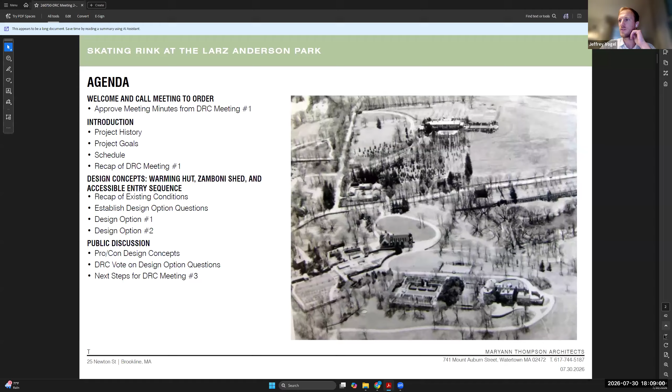Okay, great. Evening, everyone. I'm going to share my screen and pull up our presentation. So, project history — just a quick refresher on the previous meeting, a quick recap of where we left off last time.

We have our project goals that we went through last time: fossil fuel free mechanical systems, managing change, and looking at the historic gardens, which was the focus of our last meeting. Rink improvements and site improvements are things we're going to be looking at in future meetings, as well as seasonal year-round programming.

Today, we're going to focus mostly on warming hut and support building improvements, as well as site accessibility — the paths up to and around those buildings. That's going to be our focus of the meeting today.

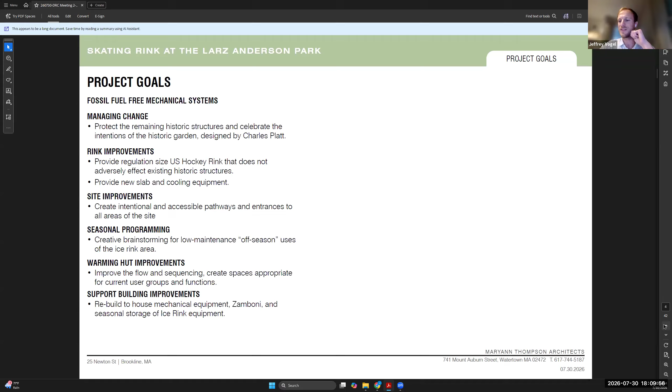Last meeting was a great chance to go over all of this and get everyone's thoughts and feelings about what's important here, and lay the groundwork for us to build off of for this meeting and the future ones. So, a quick update to our design schedule here.

We've gone ahead and, after the last meeting, added a couple more. We initially just had 3 meetings. Now we're proposing 5 design meetings for part of this process. So, as I mentioned before, today we're going to look at the conceptual layout of the support buildings, the warming hut and the Zamboni shed, as well as the accessibility paths around them and up to the site.

The next meeting is going to look more in depth specifically at the ice rink and the landscape around it. The 4th meeting is going to combine meetings 2 and 3, so we'll have one concept plan that combines architecture and landscape. And the 5th meeting is going to be the final — ideally, approval of that plan along with the project estimate.

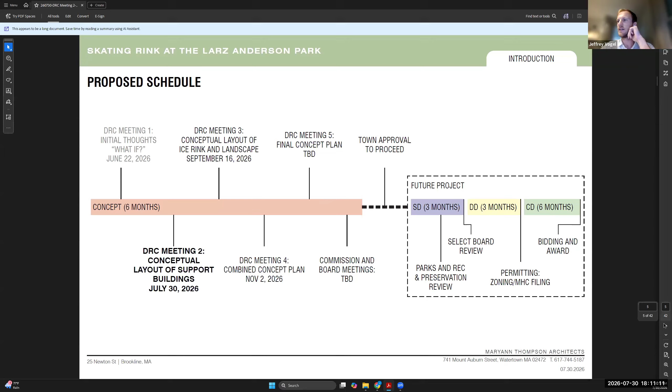The 3rd meeting, our next one, is scheduled for September 16th. The 4th meeting is November 2nd, and the 5th meeting we don't have a date selected for yet, but we should have one soon. That's the duration of this conceptual design process. Following this, we would need town approval to proceed with the full design of this project. So that's the focus here.

When we met last time, we looked at 2 separate ideas about entering the building and the site — one from the side of the existing warming hut building and one from the center. So we're going to look for direction, and hopefully approval on one versus the other, as well as the idea of outdoor gathering spaces in and around these 2 support buildings. That's the goal of our meeting today.

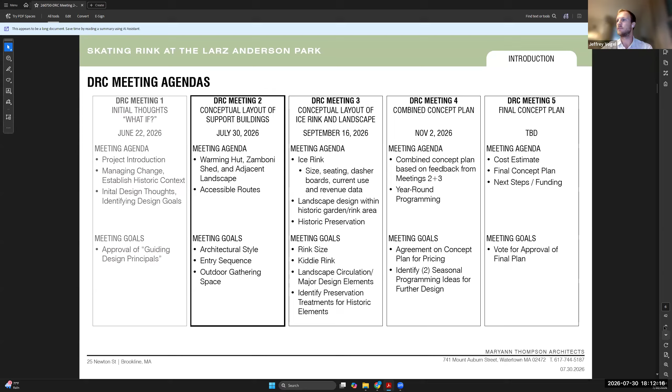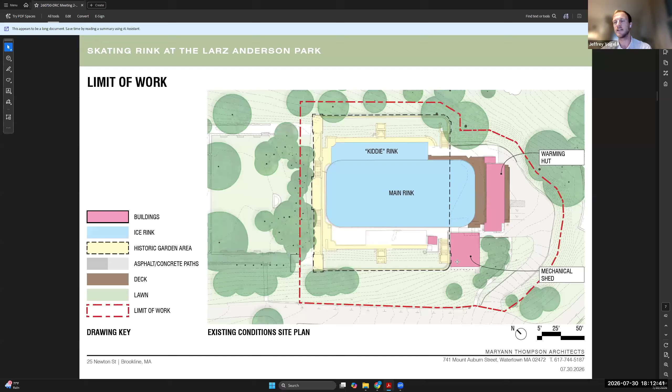Today specifically, we're looking at the warming hut and the mechanical shed, the two buildings in pink, and the landscape surrounding them, including the path up from the larger parking area, down at the bottom of the hill. That's the focus of our call today.

A recap of the last meeting, what we heard from everybody, key points. We got unanimous approval of our proposed guiding design principles for working within the historic landscape, which was great. We were really happy to have this baseline of design ideas that we're working from going forward.

A functional ice rink is going to be crucial for everybody, all user groups of skaters and hockey alike. That's going to be the focus of next meeting. We're not looking at the rink specifically this meeting, but we are actively working on it with our ice consultant to get more details so we can have a robust conversation next meeting.

One other thing we heard about the current rink is that people enjoy, and it's important, and it's in the town mandate, that we keep the rink open air. So the idea of things overhead at the rink is something that we should avoid.

We heard that it's important that accessible parking spaces remain at the top of the hill. We want to keep the site as easily accessible to everybody as we can. That was an important piece of feedback we got last time that we've incorporated into this round of design.

Improved access to all sides of the rink would be very beneficial. That seemed like something everybody was supportive of during the last call, as well as improved connections between the facilities here, the rink, and the surrounding landscape in the park.

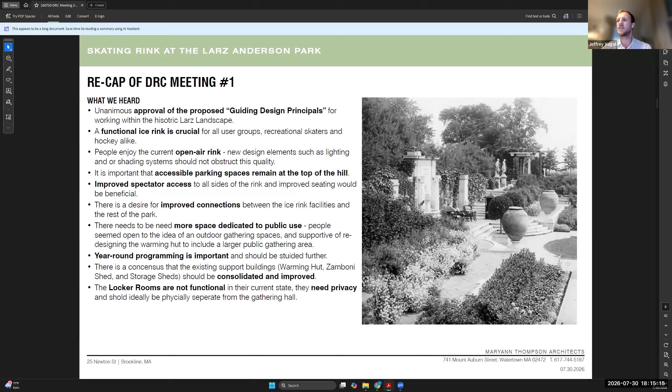So that was some of the key takeaways from the last call that we looked at going into our design here. And again, just a quick recap of the guiding design principles that we looked at.

Honoring the preservation restriction, we have preserve, restore, and reconstruct the historic frame of the garden, shown in pink. We're not going to be looking at that so much today, as we are going to be looking at the area in blue, defining a rehabilitation zone for new construction that improves the skating experience and respects the historic context of the site.

So that's what we're looking at today in relation to the buildings and the landscape around them. And the final point, prescribing solutions that meet universal accessibility requirements throughout the site and minimize the impact on the historic designed landscape. So that's a quick recap of what we talked about last time.

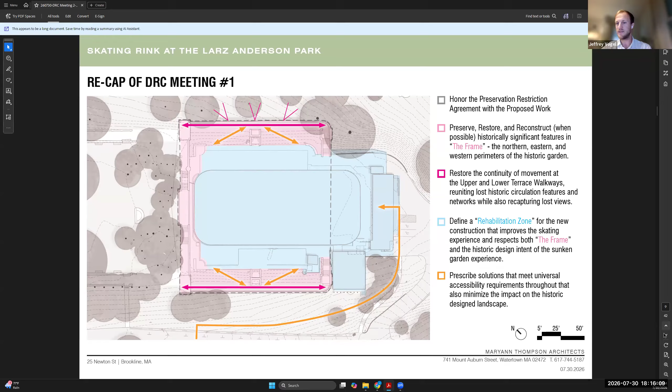Before we jump into the design, I want to just quickly take us through existing conditions. I know all our DRC members have been out to the site at some point previously, but it's been a little while now, so just a quick refresh on what we're looking at as kind of critical pieces of this redesign.

Starting on the site level, thinking about access, there's no true accessible path from the main parking lot up to the site, which is a big problem. We have this driveway too steep to be accessible, and then we have a staircase running up, so there's no accessible path up to the building. If you're not parked up in one of the accessible spots at the building, there's no other way to get there if you need that accessible path.

The current parking lot at the top, although it looks flat, our design team, our landscape team has been looking at it, and it really does have some issues in terms of ADA even up there as is. The layout of the parking spots and that area itself, although better than the driveway up, is still not quite up to current standards when it comes to accessibility.

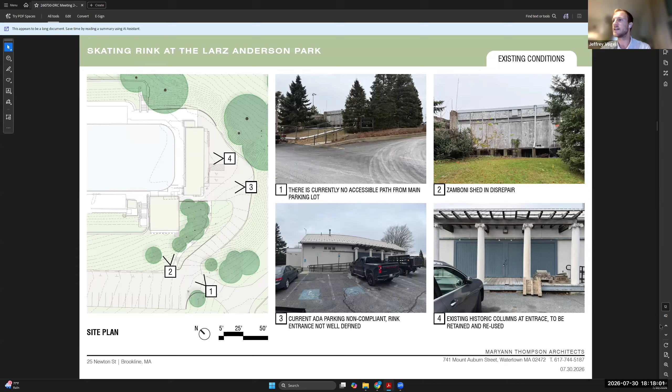Continuing looking at the site, the existing Rink entrance is not super well defined. It's kind of to the side of the building, around the parking spaces, a little bit blocked off, and not super welcoming. You come in looking at this block wall before you turn in. The accessibility right now needs to be improved getting up to the building. You have this winding ramp network that becomes a little serpentine and can become a pinch point getting in and out of the building.

Again, just looking at the Zamboni shed, its proximity to the historic wall, something we'd like to minimize the impact of, and at the same time find a way to allow people to access all sides of the rink around the Zamboni shed, ideally if we can.

And then just a reminder of the warming hut, how it looks now from the ice with that row of columns underneath that eave of the building, which we're looking at keeping in all the schemes we're going to show you today, as a reference to the old loggia, the old pergola that used to exist at the south end of this garden.

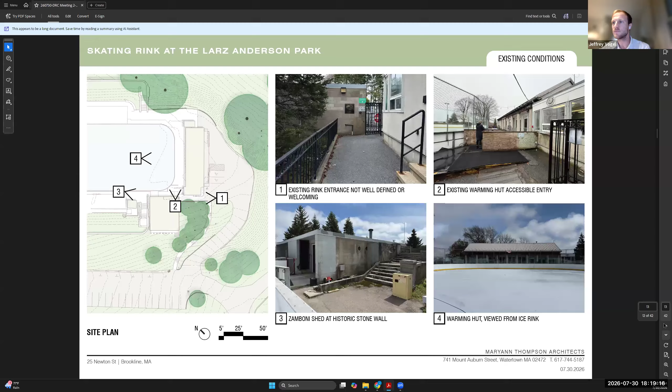A few more site photos. One pointing out the current vehicle access route is partially blocked by a storage shed here. So we're looking to consolidate that and make a more clear vehicle access route around the backside, keeping it in the same location. Again, temporary sheds that are really just cluttering the site and are in the historic landscape that we want to remove and incorporate into our new design.

One piece of feedback we heard was that the seating, where people are sitting now, is along the edge of the warming hut in these benches. But these and the hockey stick bins are things that have utility for people that use this rink. So these are things we want to think about reincorporating in an intentional way when we're coming into a new design.

And the last photo here is the current part of the gathering space, which is just a little bit too small for the size of the rink. So no matter the program, what's going on out there, it's not quite a big enough or comfortable enough area for people to sit down right now. That's at the bottom right here next to that storage shed we're looking at on the top right.

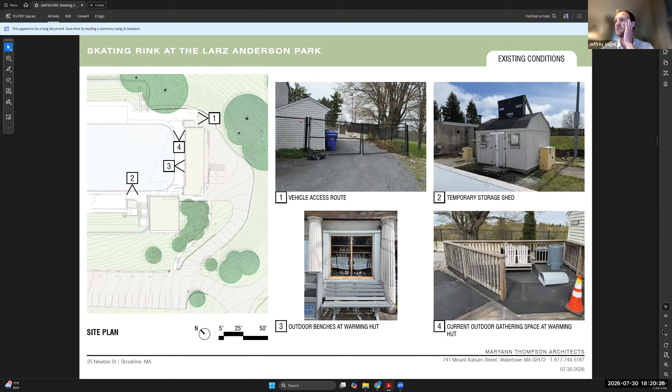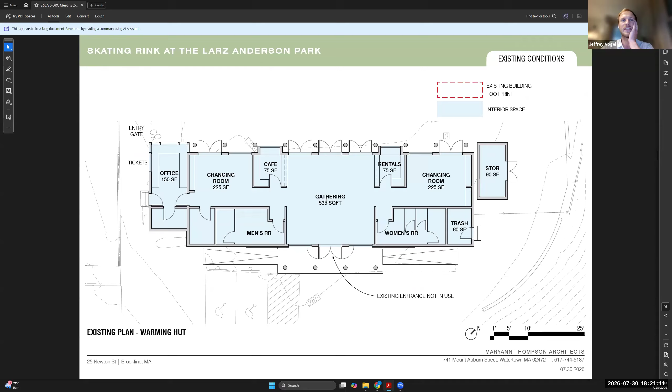And then again, as a reference here, we have the existing plan with existing room sizes so that we can have a more tangible understanding of what we're proposing in terms of increasing space or moving space, how we're proposing changes take place here, what we think makes sense. And then the same thing for the Zamboni shed.

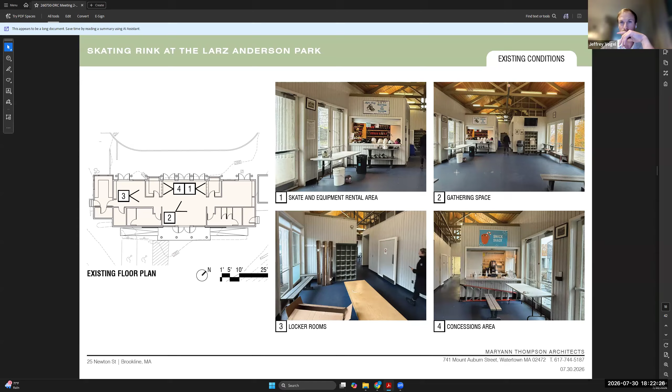So these are parts of the interior that we've looked at addressing. And then from here, we're going to jump into our design concepts, starting with accessibility.

So I will pass it over to Glenn Valentine from Stimson, who can take you guys through the beginning of our first design idea. Go ahead, Glenn.

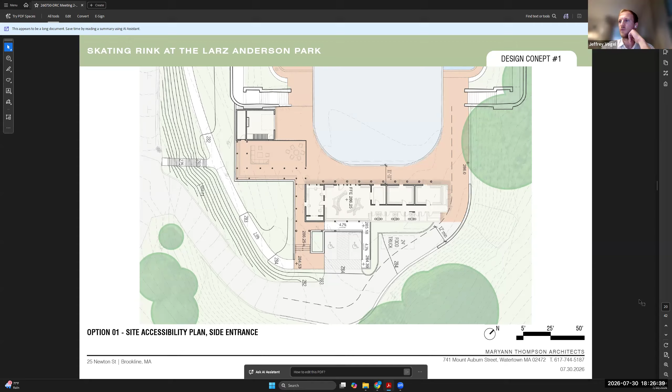Okay, that's it for this slide, from Jeff. Here, we can jump to Maryann, who's going to take us through the first design concept from the architecture side.

Hi, everyone. We're excited to get your feedback. So I think the scheme has gotten a lot better based on feedback we got from you last time.

Glen brought up that the loggia creates a kind of defining identity from the parking down below, and that was somebody on this Zoom call last time who brought that up. We just really thought it was a great idea to have something that signifies there's something wonderful up there, very different from what you have now with that pretty ugly Zamboni hut right there.

So with the entry, we're using the old columns, the four old columns at the front, and then we would move to a wood column, kind of a traditional wood column that would create the loggia, and it creates a space that's in between the warming hut and the Zamboni shed that we're thinking could be a really wonderful south-facing space that overlooks the skating area.

We're thinking it could have a fire pit that people could gather around and stay warm. In that sense, it would expand the indoor gathering space. It could have places to sit.

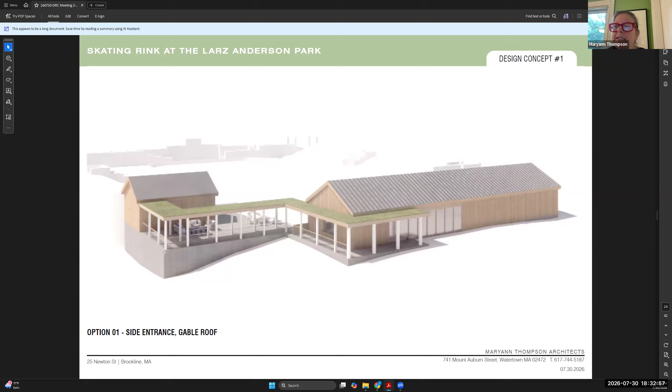We're keeping the idea of the gable roof in this scheme, similar pitch to what you have now, and it would be a metal roof like what you have now. Then you can see the hill slopes down, so where the loggia is and below the Zamboni hut, the hill slopes down, and so you're getting a full basement. It's really almost like a walkout basement that's right in on the footprint of the existing utility room, and it would be for storage and utilities. Probably have a door to the outside.

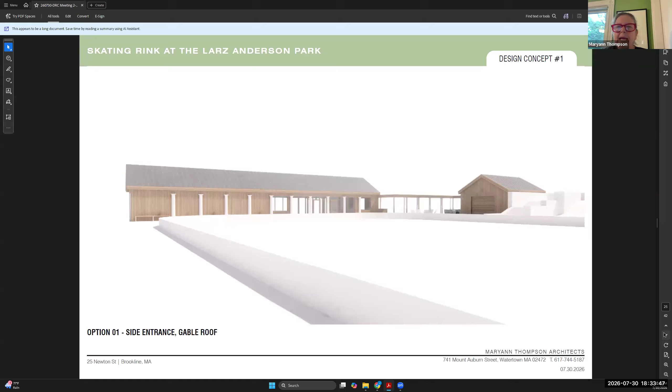I think if we back up to the plan, Jeff, I just want to say something about why. So the Zamboni shed, we looked at putting the Zamboni shed on the northeast corner, and we did a cost benefit of that, which had been brought up by the community on our last call.

The Zamboni, because it crosses the sidewalk or the plaza to get onto the skating surface, it's possibly dangerous. So it's much better in this location, but there were two reasons that we kept it here.

It's much better in this location because the kiddie rink is up on the right side of the page, and people might be going from the kiddie rink to the fire pit to the gathering space when the Zamboni's out on the ice. So that's kind of a desire line, a pedestrian path in the northeast corner of the site. That felt like a bad idea to move the Zamboni, since we don't want it crossing people's paths.

The other reason was it would be very expensive to move all that. We have all the utility lines coming in, basically right below that outdoor seating, that outdoor couch. So we decided to keep the Zamboni here for safety and cost reasons. Plus it gets you a plaza that's south facing, which would be amazing in the winter in New England.

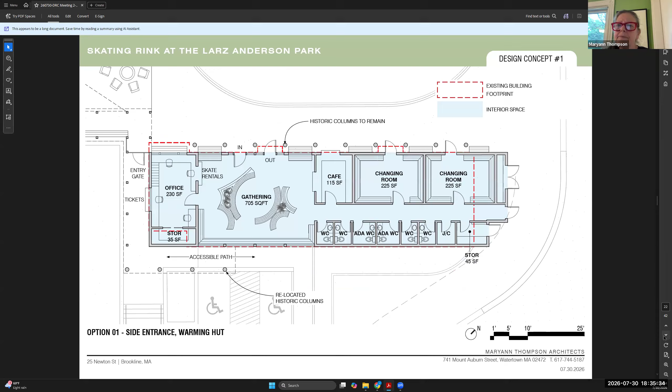Okay, and then the next one. So somebody on the call last time, one of the community members, said, why aren't you guys testing something that's a little bit more contemporary? So we tried a butterfly roof with the same principles.

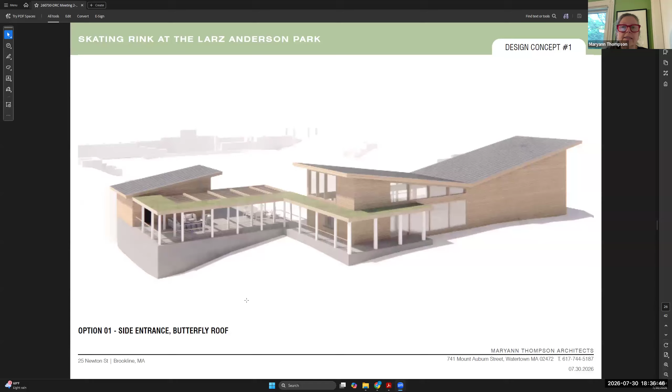We're happy with both. We're also trying a trellis over the outdoor seating area in this scheme, which is mix and match, it could go with either one, so nobody has to put up sails in the summer. It's just always kind of a place that could be shaded. We'd orient the slats of the trellis to let in the winter sun but keep out the summer sun, so it would be multi-purpose for winter and summer.

We have this view from behind as well, just to look at how does that feel when you're skating. Does it feel right? Does it feel like it fits this site? These are the things we want to hear from you, weighing the kind of stylistic consequences. What are these associations? And then next slide.

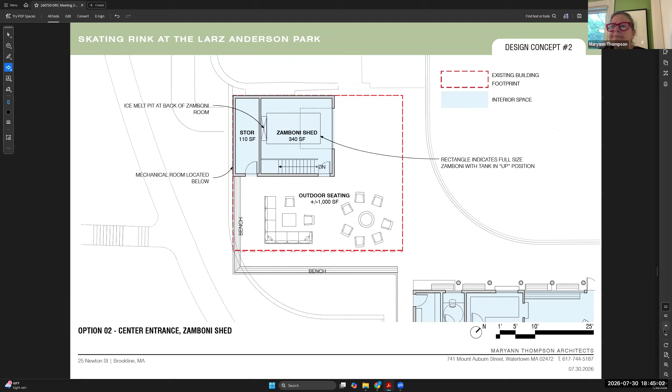Okay Glen, here's the character of this transformed landscape. Again you have that entry walk from the parking area, imagining a meadow flanking it on both sides, giving a sense of walking through this native meadow. You could have flowering trees, almost feeling like an orchard as you arrive. In this sketch, you get the sense of how this sloping walkway takes you directly to the central entry with no stairs, just a nice smooth transition to that space.

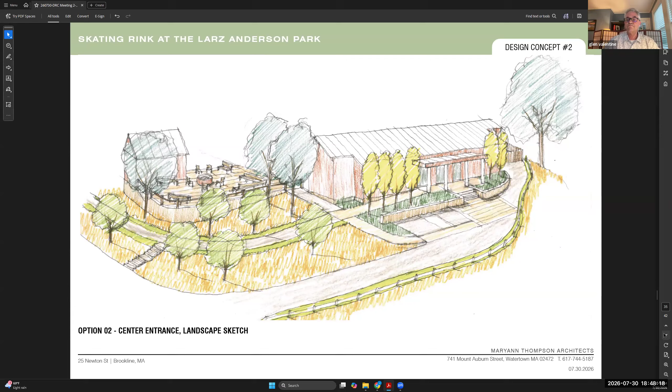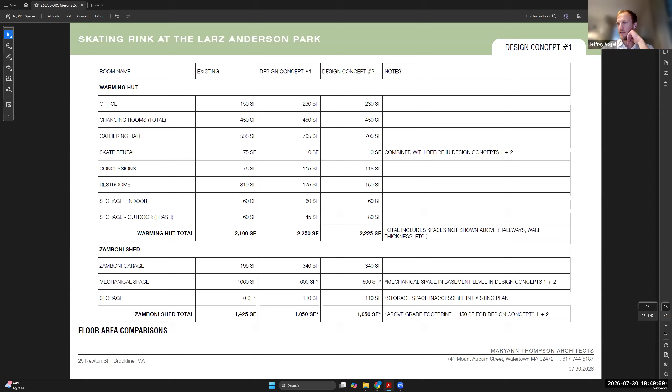So that's here as a reference point. And then from here, I think we're going to jump into our public discussion and the design questions that we'd love your input on.

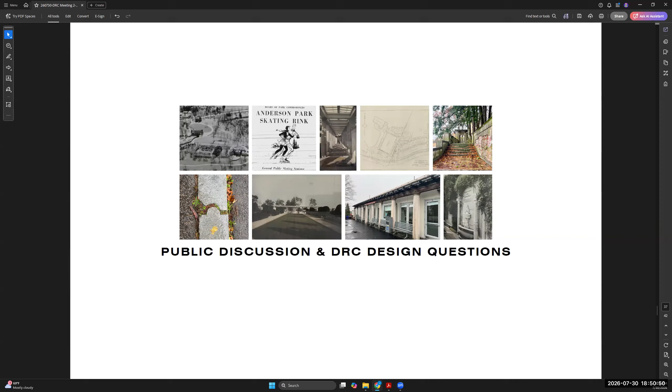I really like the two schemes that you put together. It's very interesting because I always think of a mix and match thing with regard to design. So I just wanted to make a few comments related to the building, if that was okay.

The first thing I was thinking of is I like the loggia connector. I think I sort of suggested maybe something like that, where you could make a connection between the two buildings and make it look more like a complex rather than two individual buildings.

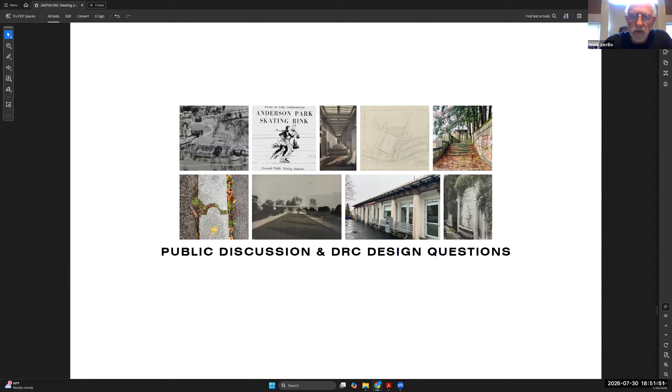I like it because I like the idea that maybe in the corner of that space, if you could put that plan up again, I could suggest we might look at a tower in that corner - the one in the furthest corner out on the lower side, where you could walk up and take a look at the garden at a higher elevation, any renovations happening to the garden, and a look at the entire open area of the rink. That might be something you could think about as a feature.

I know that at Putterham, at the golf course, there's a way to look at the greens in front of you by going up an open stair. I don't know if anyone has played at Putterham, but that's the kind of thing I'm envisioning - not really an enclosed thing, but maybe a stair up to a second level where you could actually look over the top of the buildings.

The other thing I was going to suggest is since we don't have the ability to use natural gas in the fire pit, I guess we'd be using propane. But even so, you might want to consider an open campfire type situation where you could build a wood fire, as if it was a campfire. That's just a suggestion, because it could also be used by people to roast marshmallows and do some other things, if allowed.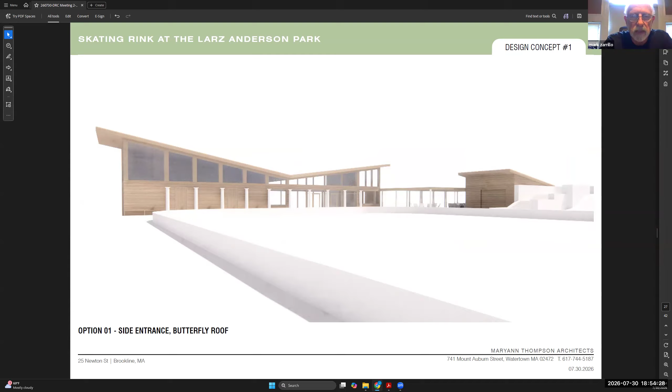I love the center entry coming in. If you combine that with the loggia, and in a tower that sort of pulls everything together, I would love to see something along those lines in terms of an architectural expression.

And lastly, I think - oh yeah, if we do work with the loggia wrapper that connects the Zamboni shed to the main building, you might think about not making it a flat roof, but making it slightly pitched.

It just adds a little more interest to that scheme, to that look, and I think it would coordinate with the pitches on the other roofs, if you could consider that. Those are my comments, but I really like the layout of the second scheme with the center entrance combined with some of the other design features that you came up with, which is really good work.

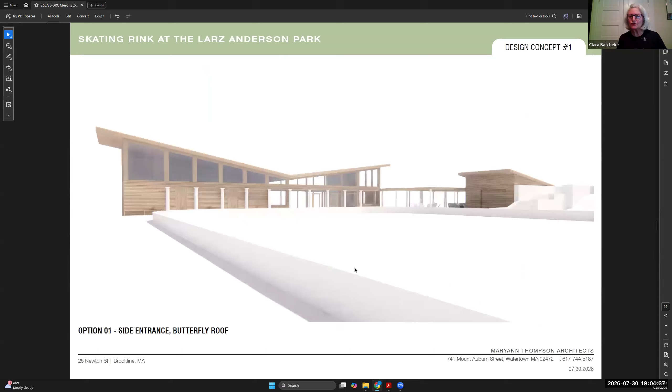So I'd like to see the structure kept fairly simple, as you've shown it in the other two schemes. I like the center entrance, and I think the loggia you were talking about in the first scheme you presented, with the entrance on the side—I think that's such a strong image. It almost detracts, you know.

I like keeping it—I like that there's a wonderful sitting area next to the Zamboni shed. And I think there's a way you could put an interesting fence around the sitting area. Whether we have a fire pit or not remains to be seen, but you could do something, a decorative fence, because you're going to have a wall there or something.

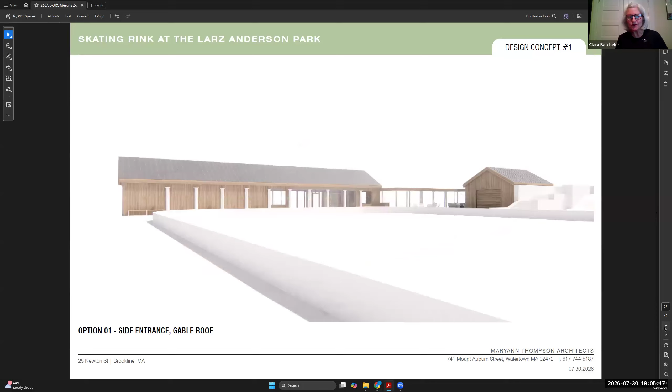But I would say I like the simpler scheme that has the entrance centered. And I agree it would be nice to be able to get your tickets on the outside as well as going in. But I think it's really nice how you focused this presentation on the buildings, and that's all I have to say. Thank you.

All right, thank you. Next, we have Jason. Hi, everyone, thanks for the work. I'll try to keep this brief. I have a number of comments, and I'll go through them, as my dad would say, staccato style.

First of all, I thought it was very clever the way you integrated the services and created the rooftop area on top of it, minimizing the massing in the building. I think that's great. I think I'm one of the lone people who slightly prefers the non-central entrance.

I think that the exterior ticketing makes a lot of sense. I kept imagining in the central scheme doors opening and people getting in the way of the gathering area in the middle. I think the side entrance has a little more, for me at least, a coherent plan.

I like how the office is consolidated as just one sort of generous gathering space. And then on the other end, it's just sort of the services in line.

I like the trellis, but what I would say—and I think you noted this, Maryann—it's used in the winter, it's also used at night. So make it something that's meaningful when you're cold and it's 10 degrees out and sunny, but also when it's like 4:30 at night and it's hockey practice and you're arriving and you want something welcoming as well. Maybe it's not sunlight, maybe there's some other thing integrating lighting or something like that.

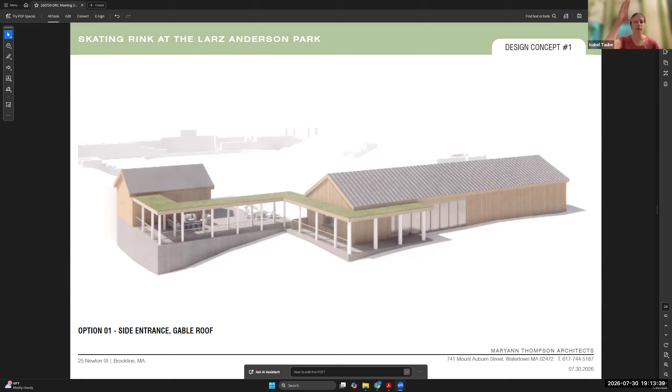A couple of questions. I'm wondering how many stairs are in the lower staircase you proposed. You have the long path, but you mentioned a lower staircase as an additional access route, and I'm wondering how many stairs there are just to get a sense of that. In terms of the relationship between the Zamboni hut and the outside gathering area, I'm wondering what happens when the Zamboni goes out and what the effect is on people sitting in that gathering area, if any, and how that's going to work.

I know you've already mentioned this issue of pathways and what's crossing what. I'd like a bit more explanation of how that is separated out, the Zamboni moving onto the ice rink from the experience of people sitting in that public gathering area. I would also advocate for more seating along the historic garden area, which we haven't talked about yet, thinking about how we might use that for viewing as well. That's a conversation for another day.

One point about the interior, and this is my last one. When I was going through it with Tim Davis, he mentioned there was an ice sharpening area for sharpening ice skates. I'm wondering how that might be integrated into your plan, because that hasn't been mentioned yet. Thank you very much.

Thank you. So Isabel had a couple of questions. Maybe Glenn could tackle them, the one about how many stairs for access.

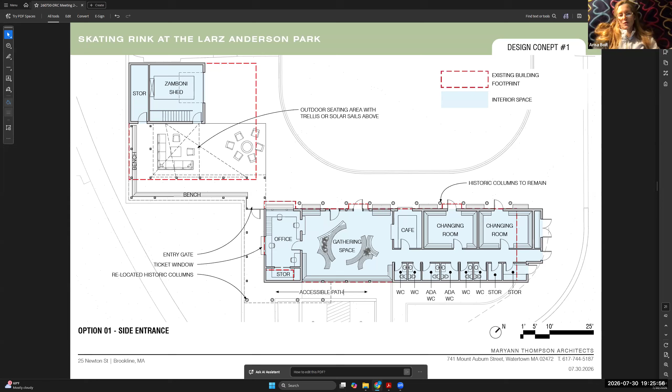And the changing rooms, so if we could split them up a bit, I think it would work better for the public if we're going to go with the side. I hope, again, it's not my preference. I would like to see us blend these more and see what we can do with them. But I did want to bring up, especially those historic columns, they really should stay centered on the building. Otherwise, it's going to feel out of place. Thank you.

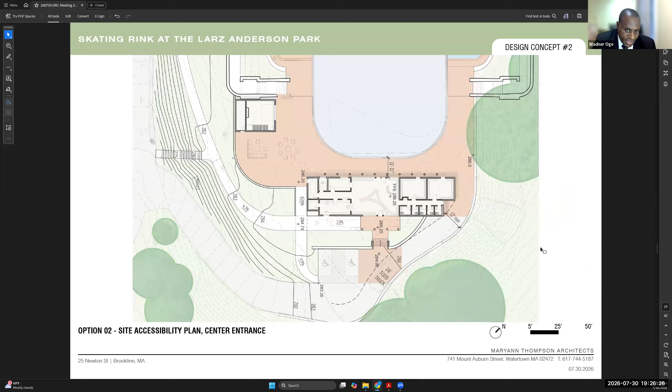Good evening. Just two points that I want to make. Thank you for the design. I do like option 2, where it's central, because it gives you a feeling there's a drop off and then you just come in at the center. And if that design can incorporate it all, the option, also making the ticket windows facing outside. If somebody wants to purchase tickets, they can do it either outside or inside, have the option available.

And another point regarding storage, there's a Zamboni. Would it be feasible to expand it on the left side of the building so they can add the storage instead of pushing it toward the rink? Because I believe there might be some space if it's expanded to the left side. Those are the two points I want to make, but I like the center.

Thank you. One other add-on question I have to what Wadner just said, from the slide we're looking at right now, is there any room for expansion upward to the site, and could that create some of the additional storage space? Maybe Glenn has an answer to that, or Maryann. When you mean upward, do you mean kind of to the north on this plan? Right, to the north on this plan.

Maryann, do you want to take that, or I can talk about it? Why don't you take that?

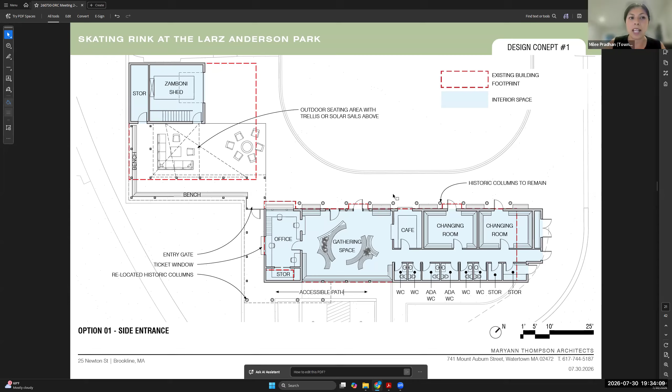So the idea is that once the design team has direction on which concept to develop further, you saw that Jeff presented earlier toward the later design review meetings, maybe design review 4 or 5. The team would do a cost estimate, and that's when we'd get a sense of the total budget cost for the project. Then, the idea is that once we have that, town staff could think about planning for the next steps for construction implementation.

But don't we have a bit of an obligation to keep this within scope, not just of the skating and the historic landscape, but of keeping something affordable, not outrageously fantastical, or at least having guiding principles as we make comments about what's possible? I just thank the designers so much for taking this far. It's great, but I'm concerned about that aspect.

Right, absolutely. We should definitely keep that in mind and make sure that it fits within the context of the place and gives what we need, but also importantly fits within the budget. It needs to check all the boxes for us. If I recall correctly, very loosely, we were thinking around 7 million, up to 7 million. Is that right?

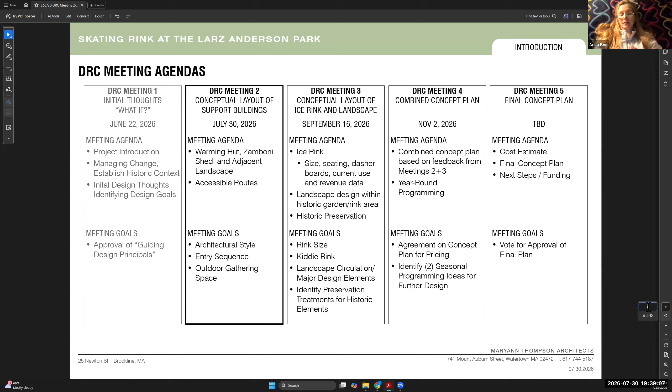All right, Arisa. Thank you. I just had a quick follow-up that dawned on me that I'd like the design team to consider: the central plan, right now, the way it is, has a porch.

I was wondering if that porch might be able to remain or be enclosed so that it takes away the pinch point. If you put tickets in there, you could use that space, because we can't expand toward the rink, but you do have that porch space you could use and enclose to take tickets and welcome people in. It could be a glass enclosure, it could really show off the historic pillars without changing the basic footprint of the building, and it would highlight some of the beauty of that.

Even if we stay with the side view, I still think it's worth investigating, keeping that feeling there. But it just dawned on me that maybe that was the answer for tickets if we go that direction, we get more space without encroaching on anything.

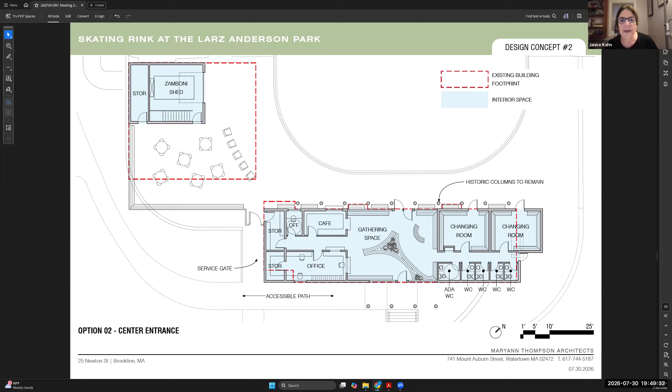So that's one thing. I do like the central columns. I don't know how many columns Mary actually did recover from the town - I know she did yeoman's work. But that's the other thing: in the first option, you have the columns all around, and I think that's also blocking the views, and it's not enhancing the space. But if there are more columns, you could define angles there. So doing it at the corners just to keep that element alive holistically, talking about keeping this sense of coherence, and then have a lower way to create barriers or boundaries on the pathway itself that are not intrusive and don't block views.

I again think you're doing a wonderful job. I like the idea of the viewing on the second floor. However, if it is very costly, I would not support that. I like the idea of having other viewing sites around the rink - that speaks to me. So again, thank you all. This is really, really wonderful work that you're doing.

I think Janice brings up a very good point regarding that there are some pros to both of the design concepts in terms of these layouts that we see, the interior layouts. So do we necessarily need to pick one, or how do we want to go about that if we'd like to combine both ideally? What do members of the committee think?

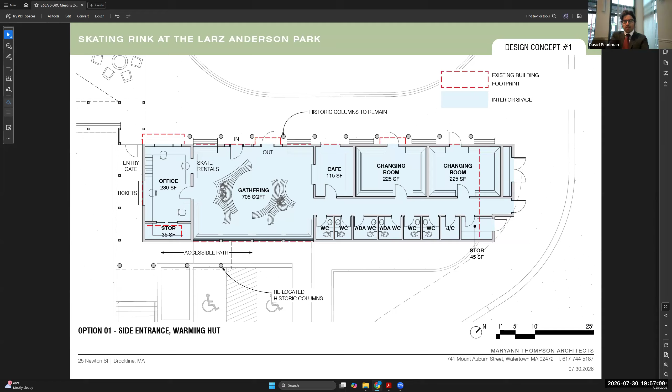It's just my opinion as a staffer working on this in between meetings with Millie and Jesse and the crew. I agree with Tim that at a minimum we are prepared to take a vote on which roof design we prefer. I didn't hear a whole lot of support for the butterfly roof, but we can go ahead and formally vote on that. So I will go ahead—well, first, do any other members of the public want to be heard before we take our vote?

My intention is to vote only about the roof for this first vote. All right, seeing none, I move that we support moving forward with design option 1, which was the more traditional gabled roof rather than the butterfly roof.

Is there a second? Second. All right, I heard Clara second first. Okay, Clara, your vote? Yes, for the gable.

Jason? Yes. Arisa? Yes. Mark? If you can unmute, Mark, in case you're muted. Yeah, I'm going to abstain. Okay. Debbie? Yes. Wadner? Yes. Robert? Yes. Mary? Yes. Isabel? Yes. Andrew? Yes. And I also vote yes.

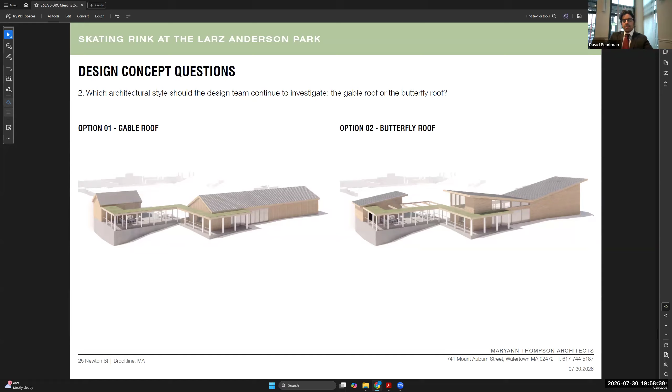All right, with that, the outdoor space. Do we want more discussion on which type of outdoor space layout we prefer?

Is the question, do we want the trellis or not the trellis? Because the outdoor area is roughly the same. I would also add that we may want to think again how this relates more broadly to the landscape

and to the rink when we're talking about pure outdoor area. So I don't know, Maryann, do you need a vote on the outdoor space there tonight, do you think? I don't think so, unless Tim would like to do that. I think we're all, and please correct me if I'm wrong, at least I think we're all supportive of adding an outdoor gathering space, correct?

I believe so, and I haven't heard any opposition to that. I think everybody agrees about having an outdoor space. There may be some disagreement about the trellis.

I am empathetic to the position that Janice articulated, that a major attraction to having an outdoor rink is not obscuring the sky and being able to look up at the stars and your surroundings. I also understand, though, where the loggia can provide some relief from the elements. Maybe this is something that could be blended as well.

What are some thoughts that members of the committee have specific to the loggia and whether to have this extra roof along the pathway?

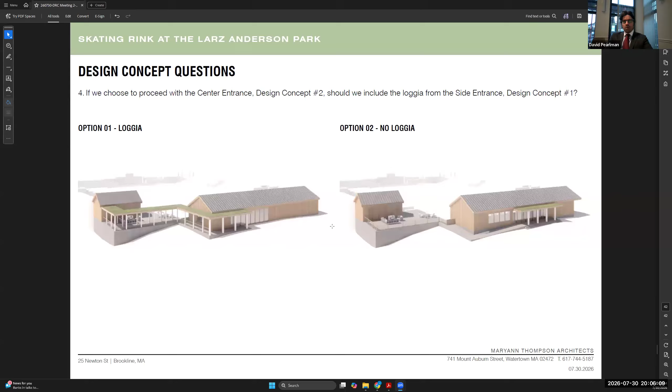All right, the other question that we've been wrestling with today: do we want the side entrance or the center entrance? We'll have a little bit more discussion there, because that's a pretty pivotal decision. Anyone on the committee like to be heard on that question, central versus side? Clara, go ahead.

Something I heard is that visually it would be nice to have the columns centered and some recognition of a center door on the rink side, but maybe the circulation, the people come through the side. When we have the side entrance, a lot of people like it, but that central gathering space that's not centered on the side entrance should be centered. So it just has to be worked on more by the architects to give it more of a central axis feeling, even if the door is kept to the side. So I think it's too complex, or too undefined at this point, that they need to come back to us.

All right, Debbie? Yeah, I kind of liked what Arisa said, and I agree with Clara, I'm not so sure about where the entrance is, but where the two changing rooms are, I think that does take up a lot of space to see the rink. So I do like the central entrance better because of that. I feel like from the side, when you're on the side, you don't get as much open space. In addition to thinking about where those changing rooms are, when it's to the side, you have more space to look, but it's more lopsided is what I'm trying to say. I like the central entrance, and I do think those changing rooms take up a lot of space. Thanks. Mark?

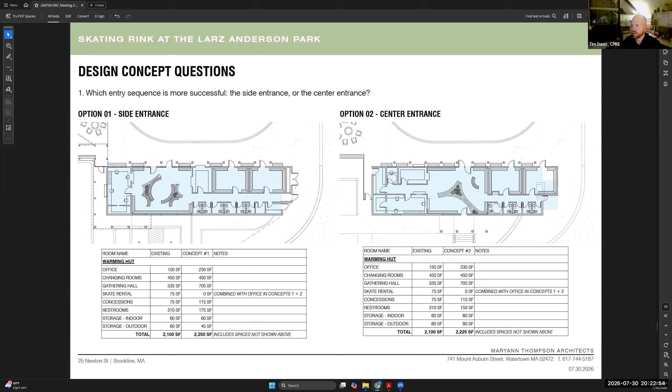No, I think this has been really helpful. So I'm ready to start sketching again.

All right, Mark, you have a point you'd like to make? Yeah, my point would be, I'd like to see that center portion raised up with a clerestory of some sort, and not have just a plain Jane building that looks like a Quonset hut. That was point number 1.

Point number 2 is I'd like to see you use some queen trusses or something inside the building to open up that whole area so you could have a larger volume of space in there and not have ceilings down on top of everybody. Maybe you need ceilings at the toilets, but other than that, I'd like to see trusses used.

All right, members of the public, last chance if you want to jump in briefly. Would anyone like to be heard?

All right, seeing none, that brings us to our final agenda item, which is next steps for the following meeting. Millie?

So the next meeting will be, let me pull up the date, September 16. Again, it will be entirely a Zoom meeting, remote meeting at 6 p.m. The focus of the meeting next time will be on the ice rink, and then the historic restoration and preservation for the existing walls and elements of the Italianate garden, and also the landscape design within the rink area.